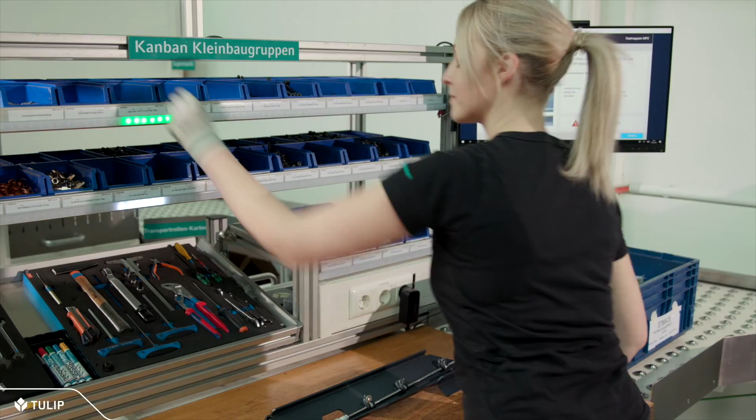Today, we'll be talking about why the food and beverage leaders around the globe are taking this journey down a path to Industry 4.0 implementations. Today, we're going to focus on scaling and innovating with the goal of helping our customers with flawless execution.

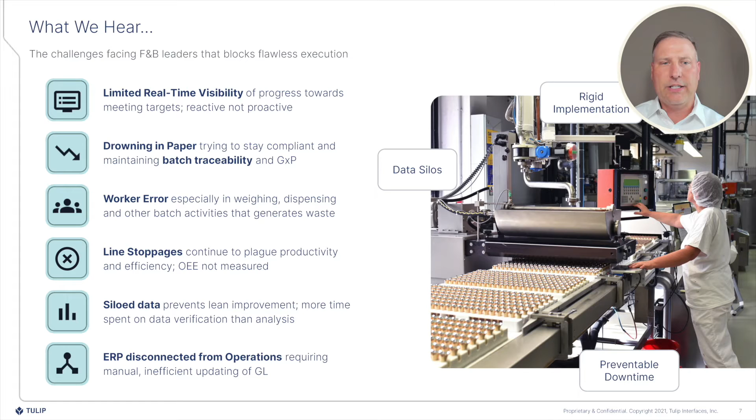And one more that I'll pick is just siloed data. Many companies have gone down a path where you've been collecting a lot of data. You might have a historian, you might have a data lake, you might have pockets of information, but right now that data is not in one common location or is not easily accessible so that data can be used to make decisions. And I think a goal of any food and beverage manufacturer going down this path of trying to execute more efficiently, having access to that data and turning it into information is very important. So with that, I'm going to turn it over to Sanjay to talk through some of these challenges in a little bit more detail.

Thanks, Jason. You spoke about some of the drivers for the industry, especially on guiding manufacturers how to stay ahead of the competition in a very rapidly changing market. There is a very generational shift on how food is viewed, right? The time is really ripe for addressing some of the systemic challenges that have hung around with manufacturers in their factories for a while now.

The other thing right above that is you need operational data to become visible so that you can plan and better execute, especially when your demand patterns and recipes and consumer needs are changing, right? Again, having the muscle memory built into the tribal knowledge of people's heads is okay, but not anymore, right?

Food safety and quality is critical, but manually inspecting in that quality and relying again on people is just not scalable. You can't meet your demand without adding much more manual labor, and your compliance activities then just become more and more, especially with the FDA standards tightening as we go forward, right?

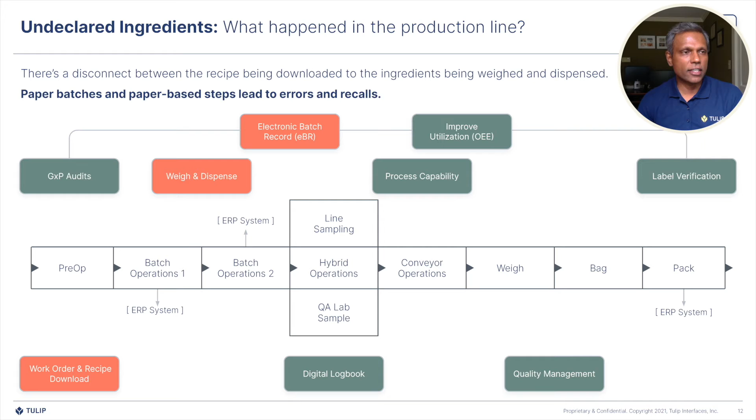So if you look at your error source in this, instead of having a digital system or an electronic batch record that you can automatically generate, what a lot of people have is paper-based travelers. And these paper-based travelers turn out to be your song sheet, right? Which is what you have to follow. But when you convert that to a paper-based record, you open yourself to a lot of issues, right? Recipe changing, a less experienced workforce and greater demand just fuel this problem.

Especially writing down supplier lot numbers, or manually signing off operations after the fact, or recording some key process data onto paper, or maybe even punching it into a digital silo is not a recipe for that flawless execution that Jason talked about, right? So how do you fix some of these things is something that we will talk about when we start talking about digital transformation or the proverbial industry 4.0, right?

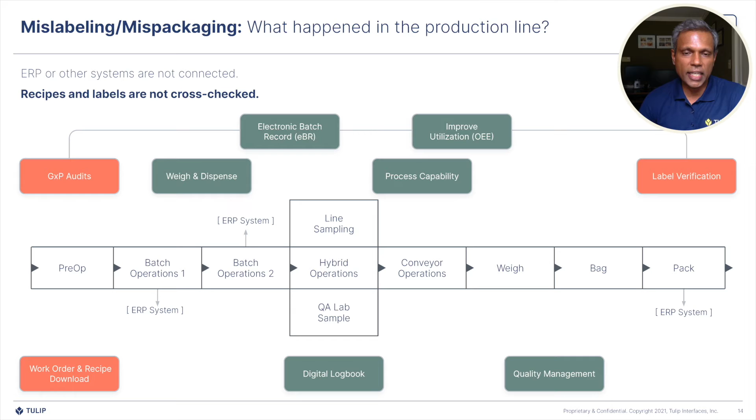The other one that we can talk about, which is very common as a root cause, is mislabeling and mispackaging, right? What happened in the production line, again, highlighting some of the key activities that ought to be connected through a central nervous system, but are not, which is really mismanaging your label management. Getting labels right all the time is completely non-trivial, given all the requirements imposed on manufacturers, with end customers being different, state level, country level regulations, all of these impact what gets printed on a label. But to start your process, a manufacturer knows exactly what that needs to be. They know what that end state needs to be.

But what gets trickier is when you have unreliable single points of failure. I've walked into some really well-run, highly automated manufacturing facilities where, when it comes to punching in at the label printer console what the label change needs to be, that's done with the source material as a paper or a post-it note or a handwritten board stuck on top of that label printer console with a code and an expiry date. And operations managers have pointed out to me, look, after all this investment, it comes down to punching this in correctly, right? And otherwise, God forbid, it ships out with bad labels.

So pulling that right label up and syncing it exactly with the recipe that's running on the line, which then syncs to your master data, is really what you need to completely avoid this single point of failure, right? And the last example that we'll look at here is around compromised product. Again, back on that same theme of you're doing all of this right, but how do you avoid that one time when you end up contaminating a product, and hopefully you catch it before it gets out of the door. Worst case, it gets out, but you're able to limit the damage. And this is the one scenario that every manufacturer wants to avoid, right?

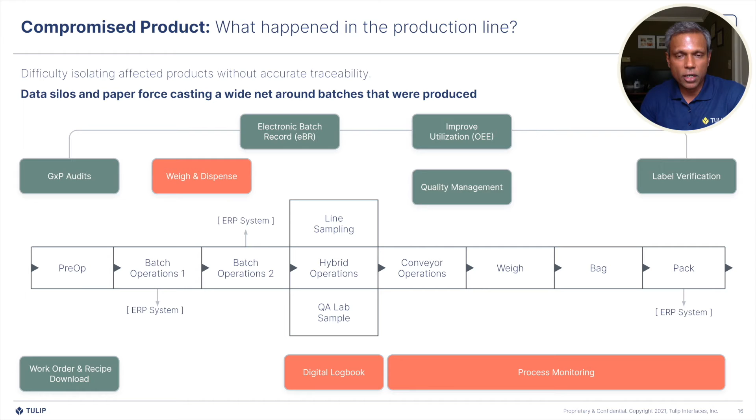So minimizing your potential for recall or minimizing the amount of wastage that you've created without compromising safety is the pain that you're trying to avoid, right? With that, let's talk about what process data collection must really be. Now, it needs to be precise and it needs to help you stop the issue before you ship product out of the door, right? And operations like weigh and dispense or your quality checks, these need to be absolutely connected with each other if you really want to get ahead of the game.

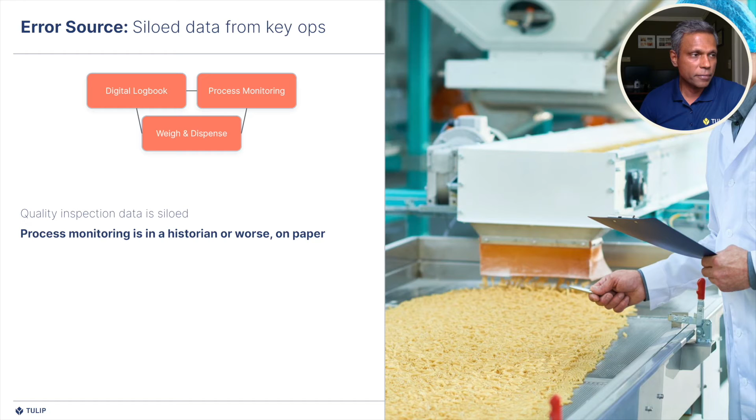In each of the examples above, from a Tulip standpoint, and Jason and I have been through this journey for at least over a decade, is really this notion of digital transformation, right? In each of these examples, the answer is if we digitally transform our shop floor, we can get a better handle on it. Well, how do you do that, right?

And really the phrase that I want to pull up here is digital augmentation, right? That is, take each of your operational processes and augment it with the digital connection. It's either a connection to a machine or a connection to ERP and/or it's connected to simple user interfaces that validate that process before things get worse, right? And again, this is less reliance on muscle memory and tribal knowledge and more reliance on a connected, digitized system that works for you.

And as you do more of this, you get into the prevention mode, prevent the issue rather than reacting to it. Compliance and safety is critical for you folks, but how much manual effort are you going to put into it, right? And it just completely compromises all this ROI that you want from your automation. And finally, give your employees, the supervisors, the production managers, and the workers satisfaction at the day's end that they have produced a product that is completely safe and compliant and they're confident of it.

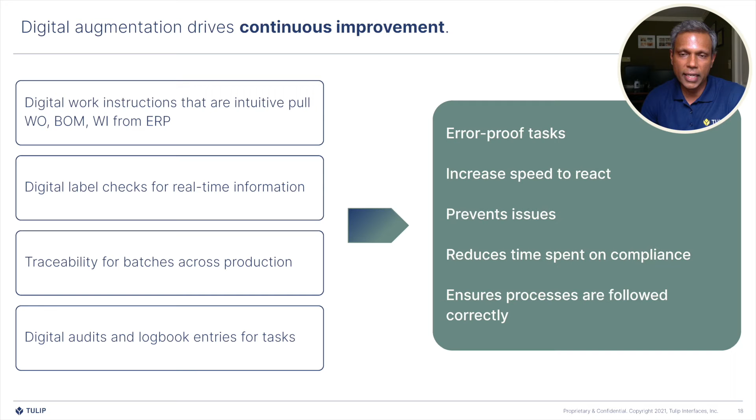So with that, Jason, if you could give us a perspective on applying this Industry 4.0. We talk about digital transformation, but we talk about it in terms of digital augmentation. How do you apply this in the food industry? Okay, thank you, Sanjay. I appreciate it. What I'm going to spend a little bit of time on is a refresher on Industry 4.0 and set us up for how do we apply it, and then ultimately, how do we help implement best practices.

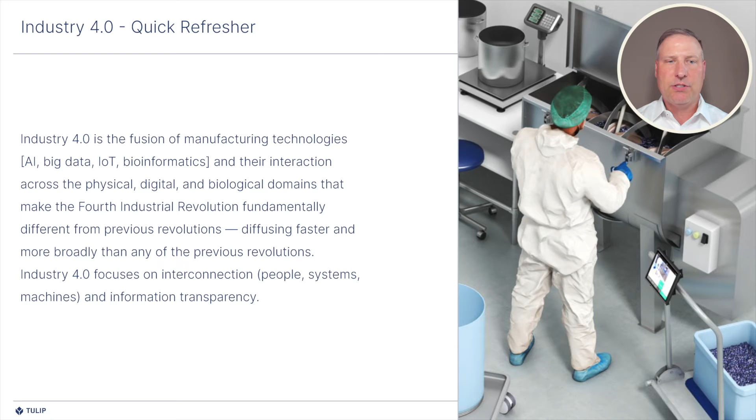So a quick refresher on Industry 4.0. This is a term that has been in the market for about a decade. It started in the 2011 timeframe and really started to gain traction in the mid 2015, 2016. But really, truly, we're seeing the adoption of Industry 4.0 happening every day as companies look to digitally transform. Think of this as the fusion of manufacturing technologies, things like machine learning and AI and big data and IoT. And it's this idea of the interaction of physical and digital to ultimately drive fundamental change in the way we produce, again, focused on productivity and efficiency. I like to think about Industry 4.0 as focusing on the interconnection of people, systems, and machines to make yourself more operationally efficient.

So what is Industry 4.0 characterized by? And we put a few bullets on each of these. First of all, a suite of digital technologies focused on achieving scalability and ROI in an industrial context. The changing relationship, again, between people, systems, and things. A dispersion and pace sufficient to earn the title revolution. Think of this as going faster than previous industrial revolutions, faster adoption, faster ROI, faster deployments.

There are three main drivers in Industry 4.0 that are focused on manufacturing. The first is the same thing we talked about in the food and beverage industry, this idea of how do I merge old and new technologies simultaneously? How do I work with old and new equipment to produce in new ways? The convergence of use cases in manufacturing. It's no longer focused only on yield or productivity or machine downtime.

Now it's the idea of creating that batch record, understanding full traceability and genealogy, thinking about things like safety, quality, and environmental data collection. So the use cases have become a lot broader when you think about Industry 4.0 initiatives inside an organization. And ultimately, the idea here is adoption at scale. How do we make sure that every facility we have has the ability to adopt a new technology and get the benefits from that new technology?

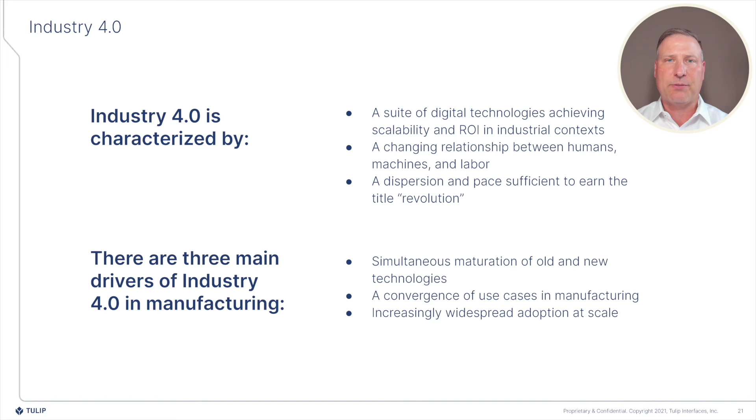So what could the end result be after you implement an Industry 4.0 type technology platform or set of applications? First is becoming digitized. We've talked about batch records, we've talked about other data, making those fully digital, no paper, fully accessible. We like to think about the augmented worker. Again, thinking about that frontline worker and how can we error-proof their production? How can we empower them to work more effectively, in a more productive fashion? And how do we make sure that they fully follow all the compliance requirements that we have?

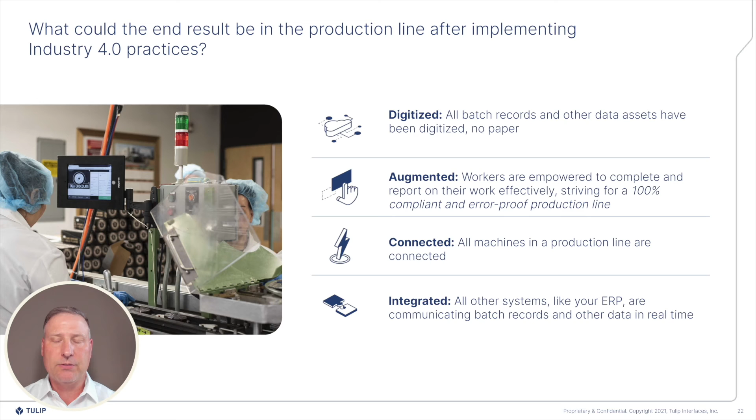Connected. All of our assets are connected. Our systems are connected. And we have this integrated view of our overall operations from our ERP, our LIMS, our warehouse management system, and then this Industry 4.0 type platform pulls it all together into an integrated, very usable system to drive operations. Leaders in food and beverage, we believe, are now empowered to do this. We're seeing it every day with our customers.

Again, talking to the analysts, we're seeing that new global providers of technology have helped food and beverage companies start to monitor their equipment and their production in real time. They now have visibility to plant metrics, machine level data, the ability to compare one facility versus another and make sure that performance is being led equally across the enterprise. We certainly see food and beverage leaders improving their performance. Changes are being made based on machine and worker data that's available in real time and helping to improve the way we produce.

Because safety, compliance, and quality are held in such high regard inside of food and beverage, we certainly want to make sure we're driving those, building standardized procedures for audits, safety walks, making sure that there are apps that are configurable to do these things and empower that frontline worker to achieve these goals. And ultimately, I've said this a few times, the idea is scale. You can grow, you can test new products, you can meet new demands, you can release new offerings. You can do that all in the confines of your existing assets and equipment, but do it in a more efficient way.

So with that, I'm going to turn it back to Sanjay to take us home and talk a little bit about an augmented production line and how we're going to implement best practices using Industry 4.0.

Thanks, Jason. Again, I throw back the one diagram of a representative line only to make this point that says even a single line has a whole bunch of complex things that you need to get product out of the door. What you want is all of these processes and activities to be connected, again, like I said, by one digital nervous system, right? And today, the technology and the methods to do it are just getting better and better. I personally have been in the MES, IoT, ERP solution space for over 10 to 12 years now. And I think this is a great time for those kind of ideas and concepts to not exist in separate platforms, but come together and deliver the promise to manufacturers, right?

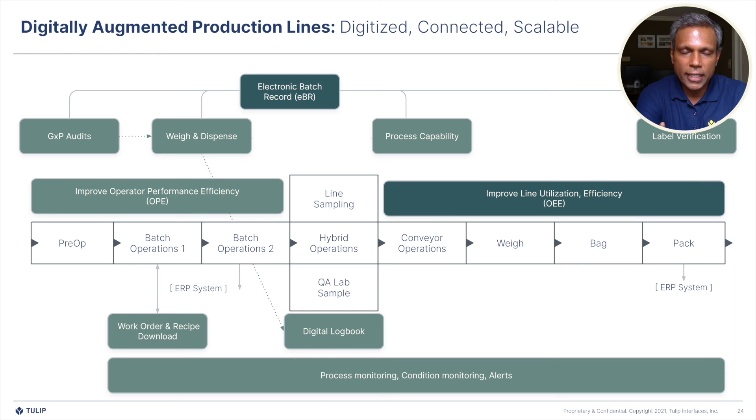And the last part I would say is what's kind of plagued this a little bit is that any solution that's deployed has been very IT dependent, right? So unless you get into the IT queue to get a solution deployed, you just have to wait. But solutions that are cloud-based with simpler user interfaces, with edge devices, and more so recently, no code being a very big game changer, it really puts the power in the hands of manufacturing engineers, process engineers, the folks who know the process, who are in daily contact with your workers. These are the folks to whom the power needs to be given for them to deploy, right?

So let's just briefly talk about successful implementation of an Industry 4.0 practice, right? To keep this simple, I think really the notion here is, and we've mentioned this a couple of times now, really looking at your journey from a digital augmentation perspective, which means put your frontline workers at the center of this digital transformation and attack it one issue at a time. And that can be done in the form of a pilot or looking at a smaller footprint of what you want to solve for, getting that solved, and then scaling and growing organically around that solution, right?

The big question here is really around how much of a cut do you want to take out of an implementation, right? Which means how much inflexibility and risk are you taking versus how much value do you want to see early on? There's no perfect answer to this, but clearly in all the years that I've been doing it, I definitely have developed a bias for a particular way of doing it. And really that way is trying to not take the all or nothing high risk solution, but to really take this and break it down in the form of low risk pilots.